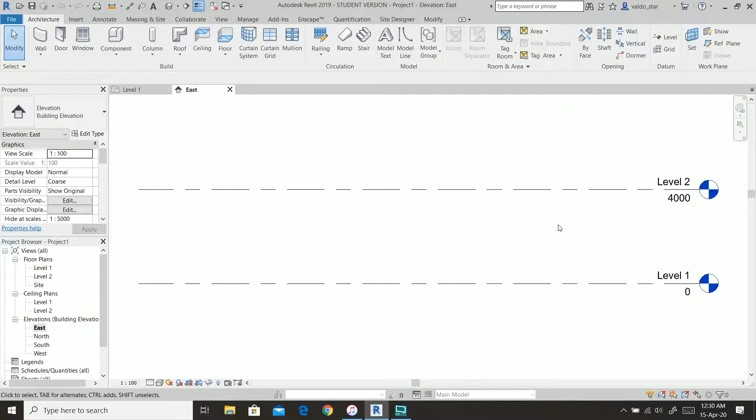You just have to go to your elevations down here. You have to check the height of each level. If you have a second floor, you also need to add another level. That is where the ceiling, or basically the roof maybe, of this secondary level will go. And let's say we just make this a little bit more precise.

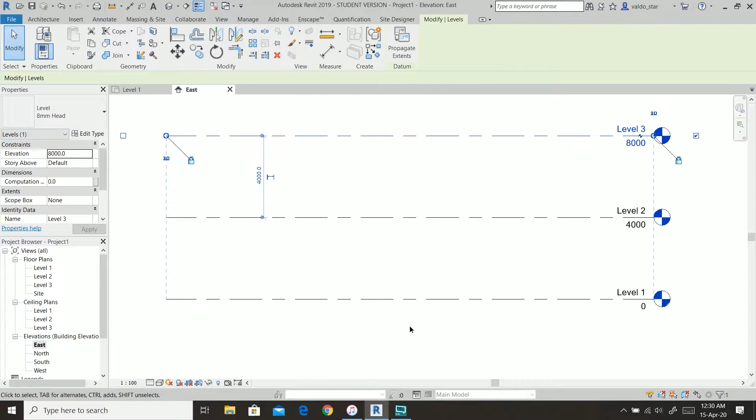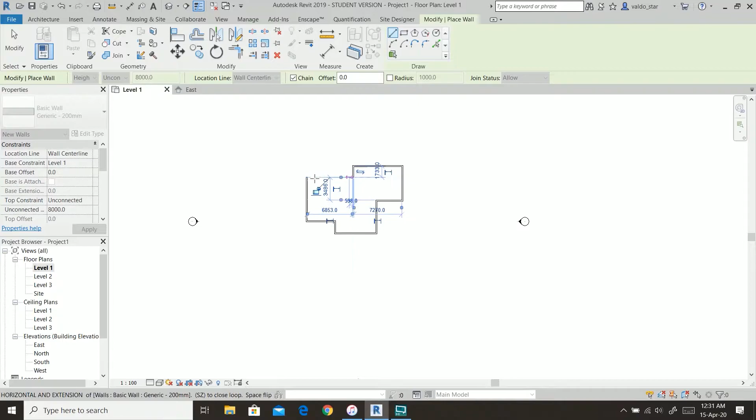Exactly. So what we have to do is very simple. We can make level 1 and we can start drawing level 1 as we know. And what I will do is, with these, I will make my outer walls. There are many ways to do it, but this is just a way that works. I will select my walls and I will set their height not to be unconnected, but to reach my upper level, so level 3.

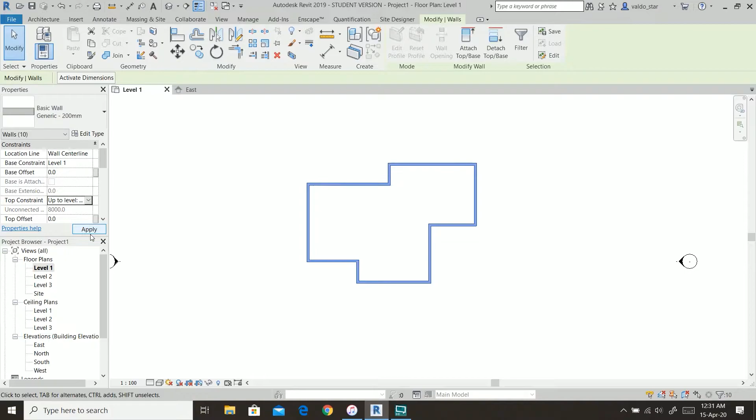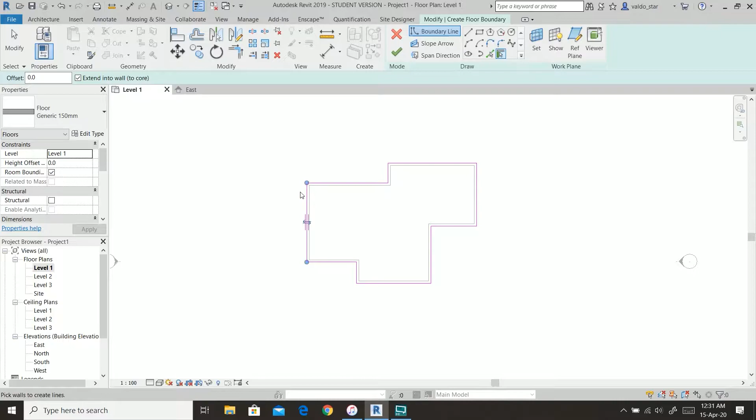Perfect. Then let's see this one. Then I have to make a floor. So I will make the floor by moving my mouse over one wall, by pressing tab, and I will select them all. And if I go to my 3D view, I will see that right now I've made just very tall walls, and I've made the floor that is on the ground.

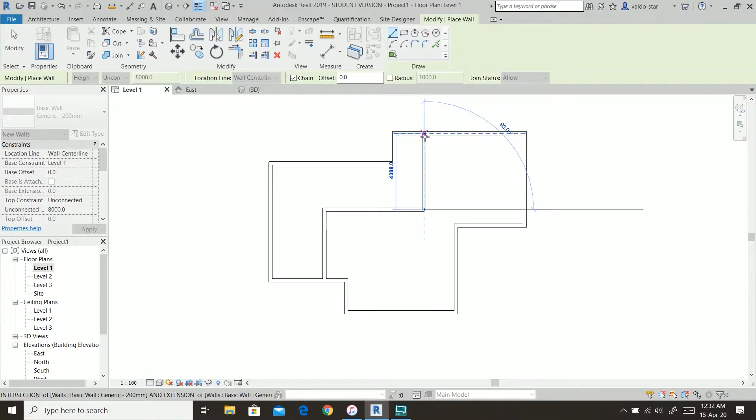Then I just go to my level 1 and, if I have inner walls, let's say, I can just quickly cut some rooms in here, stuff like this. Perfect. Then this is what happens. When I go to my level 2, I can see that these walls are very tall and I don't want them to be like this, so I can set these and I make the height till level 1.

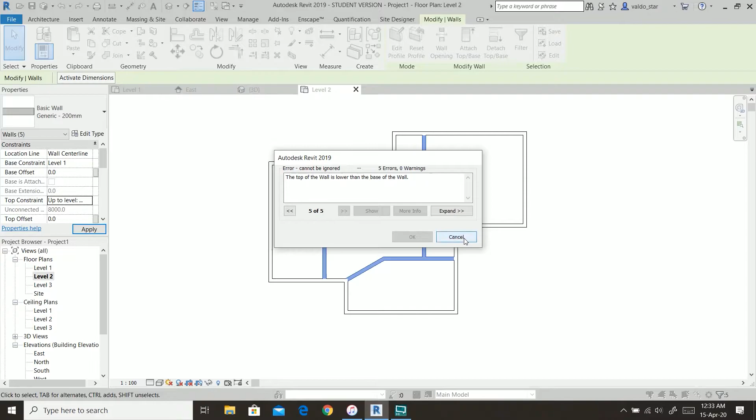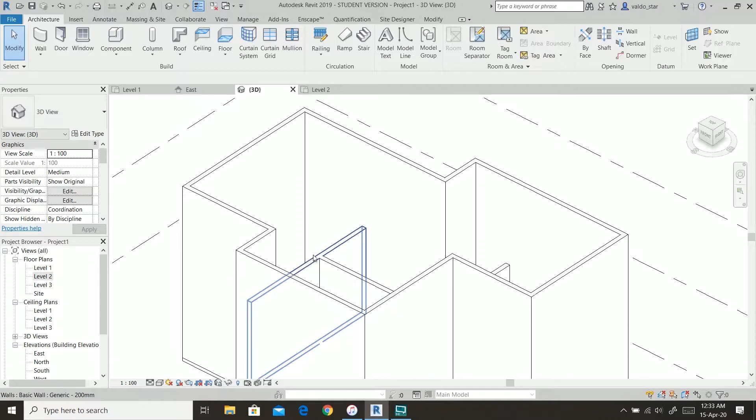Okay. Sorry, not level 1, level 2. Sorry, my bad. Maybe I should cancel this. And this is what I get. I have lower walls till here. Then in my level number 2, I can see them as grayish.

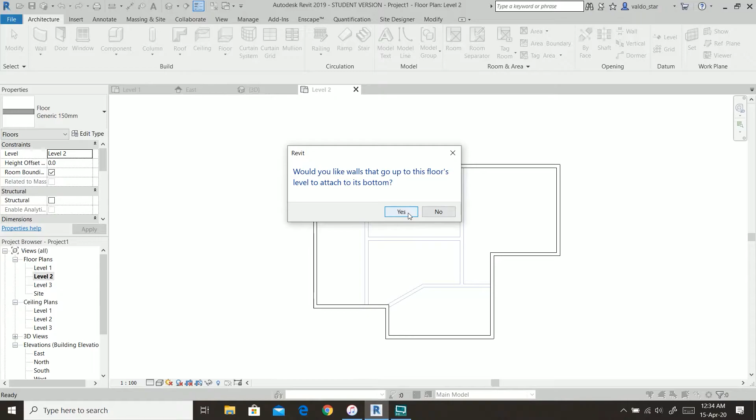If I make a floor now, look, I will select inner edges, click OK. Yes, and join elements, yes. And I can still see the gray elements underneath in my floor plan, and I can make my upper walls.

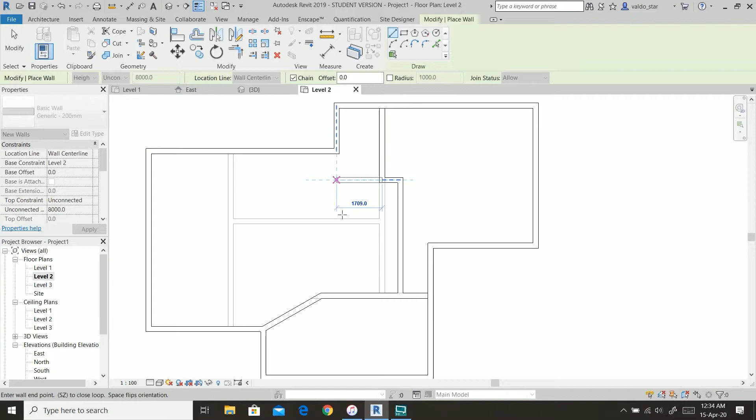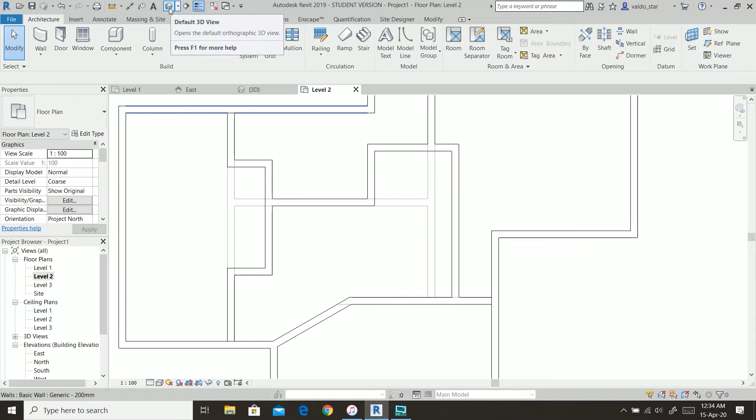I can make them similar, I can make them not similar, but I can use them as reference to make something like this. So I can snap them so that I can create a certain continuity between lower and upper level. So when I go to my three-dimensional view, I will select this, and again I will just set the height of this wall to reach level 3. Boom! And this is what I have.

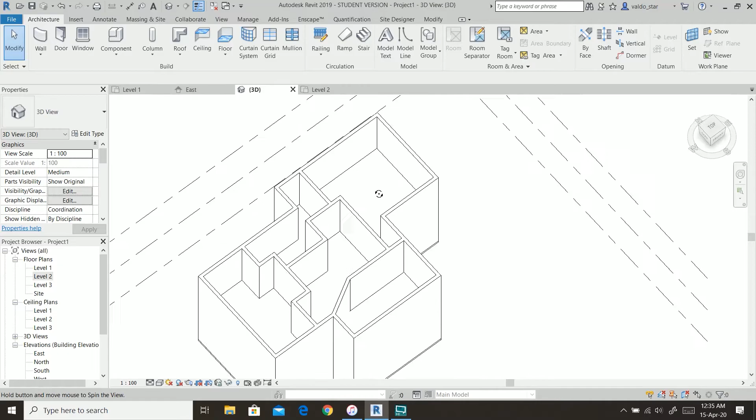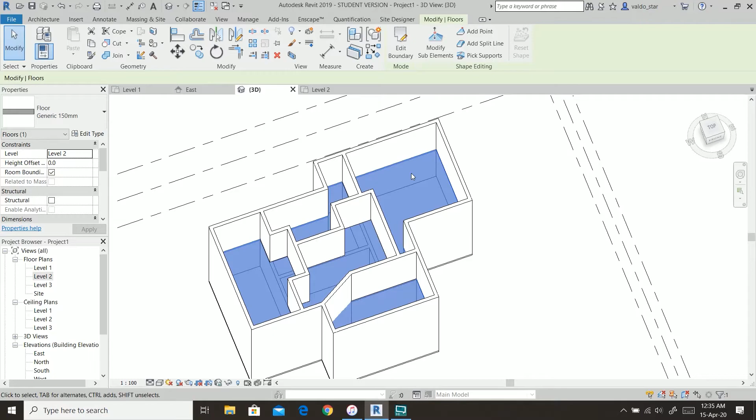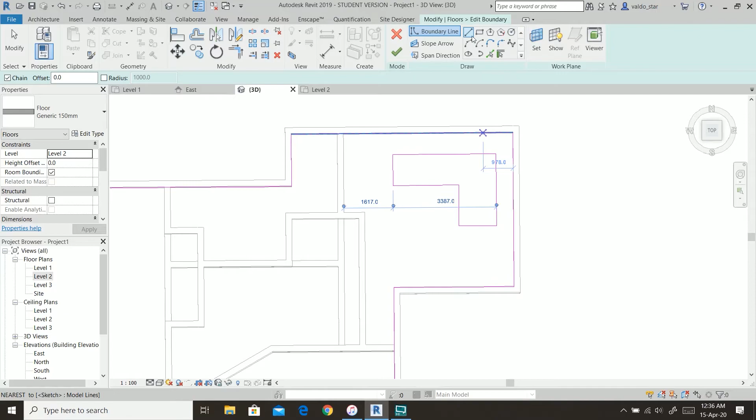Last but not least, that same student asked exactly how to make a hole in the floor to let the staircase pass through. So the thing was very simple: when you make a floor and you draw boundaries, you can see that the floor is made inside a closed magenta shape, and this is a solid object. But if inside this shape we draw another closed shape, and it can be whatever, it can be even more than one, so we can have a closed shape in here while we have another,

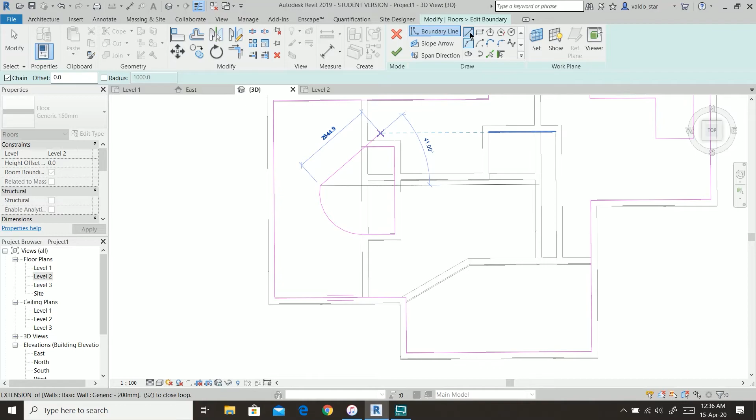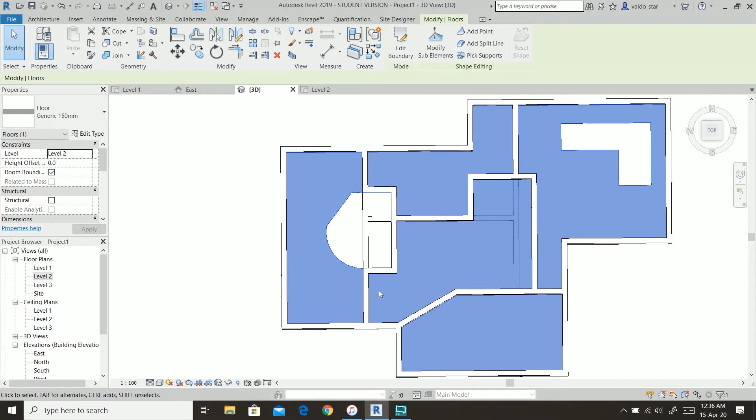I don't know, closed shape in here, and this time I will put an arc and then a line like this. So, join elements, and we have now that this floor is solid where it is blue when it is selected, and those closed shapes we have cut inside are creating holes through it, like this. So if there is an elevator, stairs, boom, this is the way to make it. Okay?